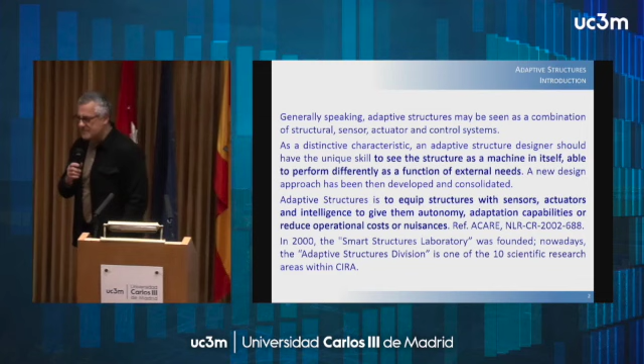But for doing what? What is the meaning of a structure? What does a structure stand for? To carry something and to have an elastic response to that. And then what else? Is it sufficient for you if I have a plastic system and I put a weight on it? The plastic will deform, so we'll have an elastic deformation. Is that the definition? It has an elastic response and it brings something, but does that define a structure?

Do you think that is a structure? Something so soft, so deforming? We are approaching the definition. A structure is something made to bring loads with minimal deformation, so as to preserve its shape. When we speak about adaptive structures, we are speaking about something that really conflicts with the definition of a structure itself, because it's something designed to allow large deformation, while still bringing loads and ensuring the keeping of a shape, so that the deformation is limited to a certain extent.

So we have the so-called paradox of smart structures. A smart and adaptive structure should be able to carry a load, be able to deform itself, and be able to keep the shape it's commanded to have without great variation. These definitions are all in conflict with one another. We have to keep in mind that we have to realize something able to change its shape, but keeping the shape that we want.

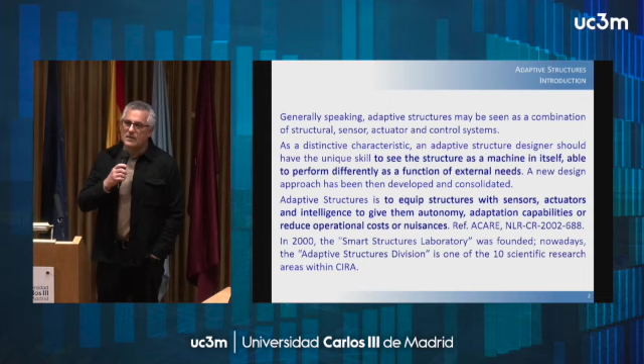One of the easiest ways to make an adaptive structure is simply to have something rubber that is very deformable, so you can give it all the shapes you want. But it is not efficient, because the way it deforms is also affected by external loads, so you are not able to match your intent with the consequence of the incident loads. So you have to develop some architecture in different ways in order to overcome this apparent paradox.

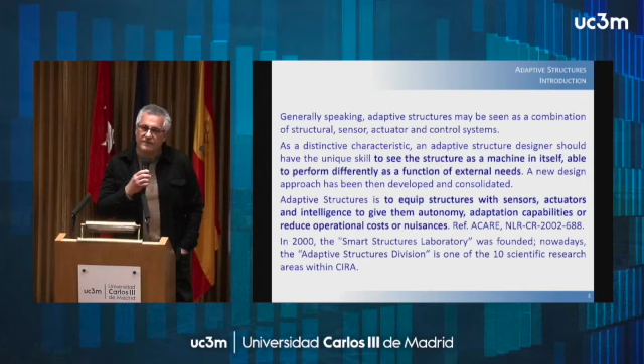One of the things that we do inside CIRA, where I work at the Italian Aerospace Research Center, is to use the actuators as bearing elements in order to give the structure the possibility of being stopped in certain deformations. This means the actuators are load-bearing elements, structural elements. They stop being just a mechanism to allow movement of something.

An automatic door does not carry any load apart from its own weight. Instead, here you have something that has to carry a load, the aerodynamic load for adaptive wings, for instance. And in that way, you have something that should resist. This implies a lot of things, like the actuator having to be sized to bear this kind of load, adding complication to the structure itself.

But the message is that you have a structure and an actuator, and the actuator chain is all part of the structural system. You no longer have just a structure, an actuator, and a sensor separately. You have something complete, something complex that overall works like a system, like a structure.

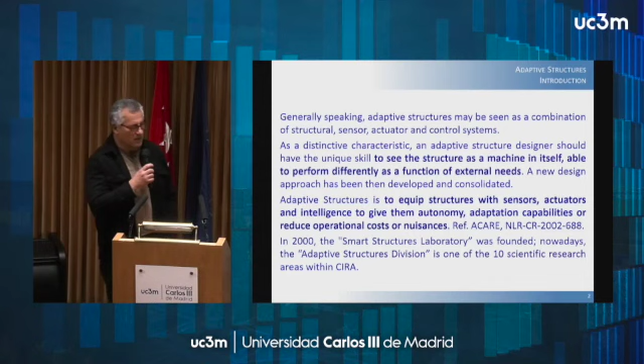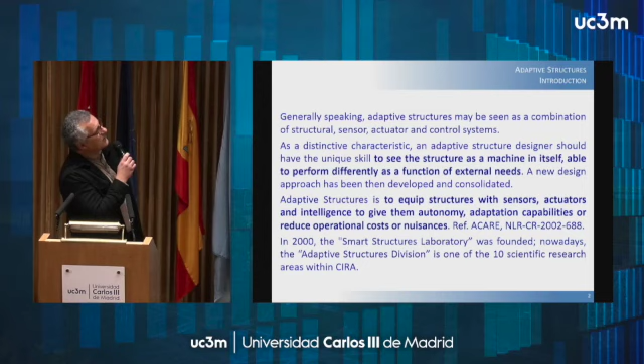If you go into the bibliography, you can find a definition of adaptive structures dated 2002, made by ACARE, an association for standards in Europe concerning aeronautical structures. They define adaptive structures as a structure equipped with sensors, actuators, and intelligence to give them autonomy and adaptation capabilities for reducing operational costs, for instance. They also define the aim of adaptive structures, but that part may be skipped within the definition itself.

This is something that works and we can consider current up to our days. But I would like you to reflect on something. If this definition is correct, and adaptive structures are made of different systems combined all together, then we no longer have a simple structure, something static that cannot be deformed, allowed just to bear weight and loads. You have something capable of modifying itself, of having different properties, so more than a static structure, you have a machine.

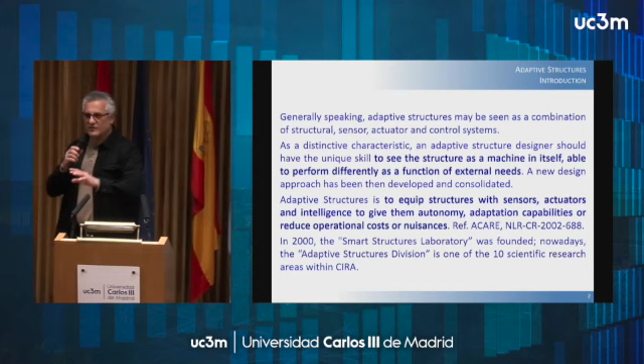We are moving, let's say, from the skyscraper to a transformer robot, just as a vision. But that is the way. You have a structure that is deforming, a structure that is a machine. And please remember this word, because I am going to show you something that replies very well to this concept, and it's very similar to the robotic world.

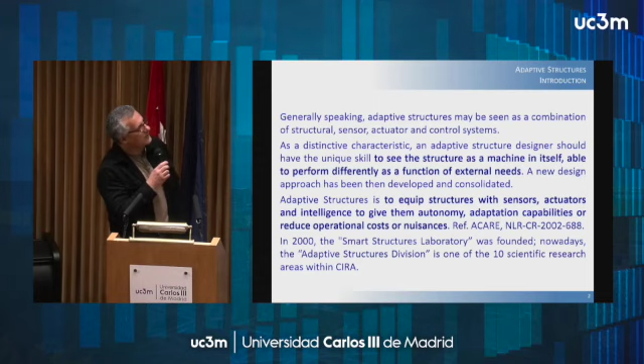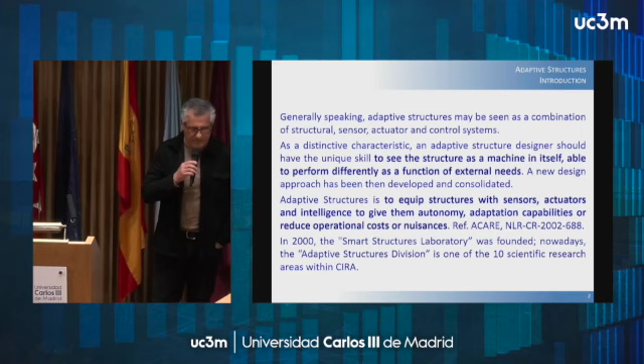In a sense, we can say that with adaptive structures, we are approaching the robotic world in another way, but maybe this can be discussed in further meetings.

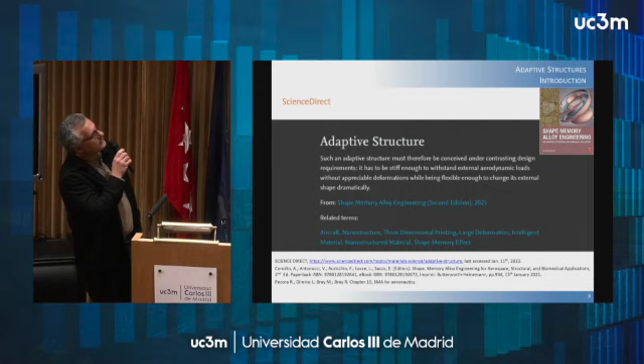One thing I am particularly proud of is that one of our definitions was reported on the Science Direct website for a month. They change the reference to different articles published throughout the world, and they took this definition from two colleagues of mine, Ignazio Dimino and Rosario Pecora. One is a colleague of mine at the Italian Aerospace Research Center, the other a colleague at the University of Napoli Federico II. They published this work within a book proudly published by us through Elsevier and Butterworth Heinemann.

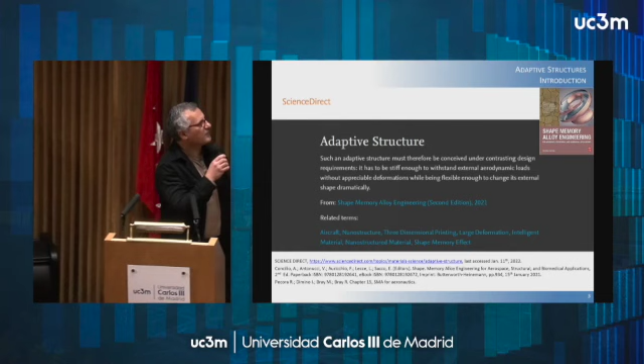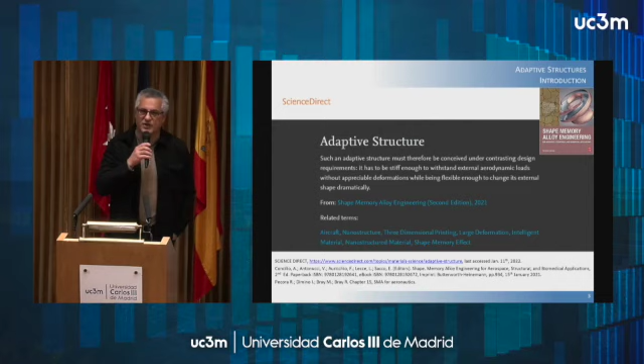That is a book on shape memory alloys engineering. I'm not making any advertising here, just a bibliographic reference. The main thing about that book is that it collects works from 50 scientists, 40 Italians and 10 from worldwide, who worked together on the matter of shape memory alloys. We will define shape memory alloys in a few minutes.

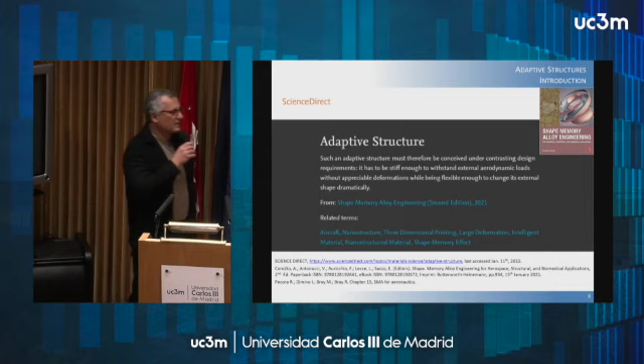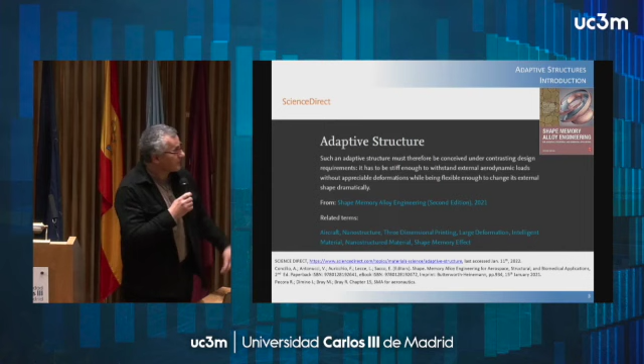The most important thing, apart from the content, and why I am particularly enthusiastic about that experience, is that these 50 colleagues trusted us and allowed us to collect their works and make this publication. It's something that happens once in a lifetime, for me at least. As you can imagine, adaptive structures may be a very, very wide topic.

You can have adaptive structures everywhere. My definition of adaptive structures is just mine - anyone can have a different one, and no one has the right response. But adaptive structures are everywhere. In a prototypic version, your chair is an adaptive structure. The flap of an aircraft is an adaptive structure. And this laptop, which you can close, is an adaptive structure.

What is the difference between all these things and the future of adaptive structures? These things are very complex and occupy very large volumes. You see the volume necessary to host the actuators of a flap that is outside the architecture of the wing, so that you have some protection to hide these actuators and so the aerodynamic flow is not affected by the presence of that system. It's very large, heavy, and room consuming.

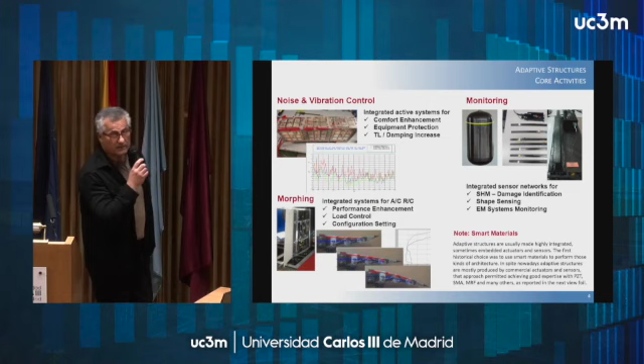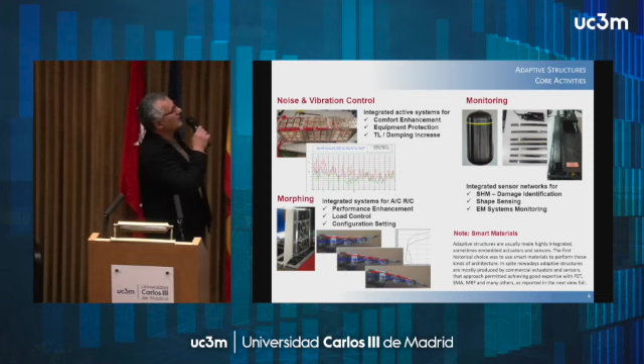The perspective of an adaptive system is to be compact, and in the first issue, to hide everything inside. In this sense, you can imagine two different kinds of adaptive structures, as figured out in this view of an adaptive aileron that we manufactured and tested in Canada at the National Research Council Wind Tunnel. It was a cooperation with the École de Technologie Supérieure de Montréal, CIRA, and University of Napoli. We developed the aileron, which had a continuous shape, and here you can see the hidden kinematics.

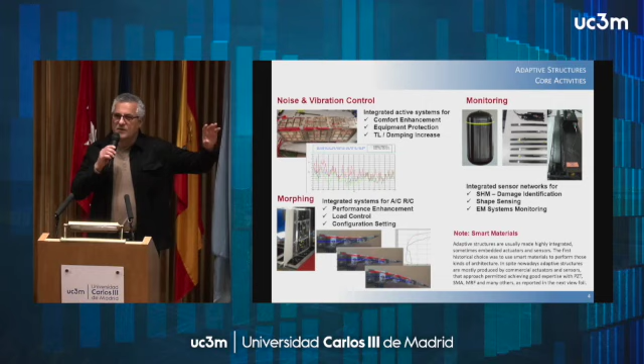So you can imagine two different kinds of adaptive structures. One is the transformer one - let's simplify it - a sort of robotic structure with all junctions, hinges, arms, and stuff like that. The other is like the Terminator 2 robot, that is continuous - usually known in literature as a compliant structure, something that is fluent and has no discontinuities. If you cover this kinematic structure with a continuous skin, able to resist external loads and preserve the shape, then you have realized what is a compliant structure through a kinematic system.

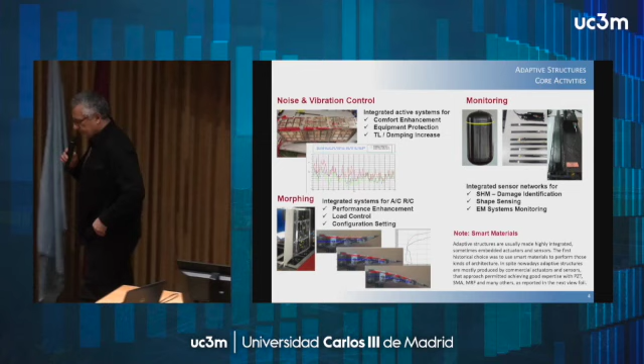I have no information about an adaptive structure today that is not made from a kinematic inner structure. It may be more or less complex, minimal, or invasive, but you always have a kinematic structure. And the skin today is the largest challenge for making a true adaptive structure work and operate, because this kind of skin shall have very conflictual properties. When you speak about adaptive structures, you are speaking about conflicts.

Systems that should do something and should do the opposite at the same time. The skin shall be elastic enough to be deformed without any effort from the actuators, so it shall stretch very easily. Otherwise, you are bringing extra work to the actuator system, which also has to deform the skin. And it shall be resistant enough in the vertical sense - in bending, it has to be very stiff. This is very complicated to obtain.

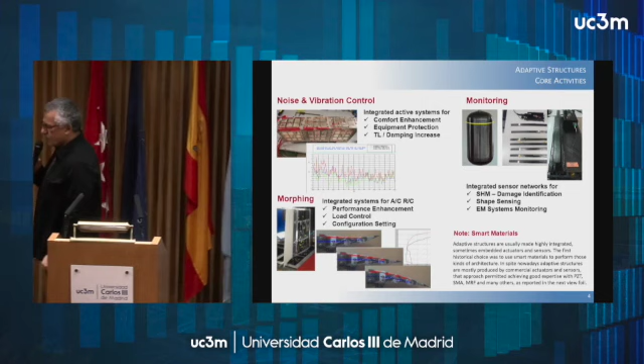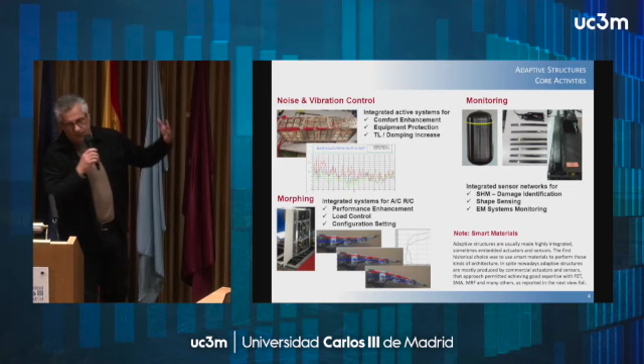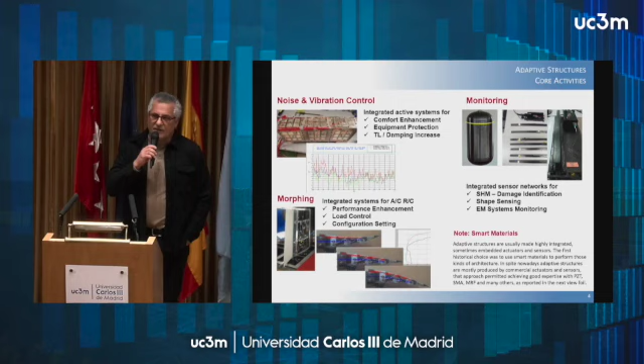As I told you, the adaptive structure world is very wide, and we at CIRA, the Italian Aerospace Research Center, do not have experience on all the branches of adaptive structures. I don't think anyone does. So we focused on three particular aspects. One is noise and vibration control. There are good reasons why noise and vibration control was the first application of smart structure systems in the literature, at least as we now consider smart structures or adaptive structures - it's a bit different, the two terms, but let's consider them like the same.

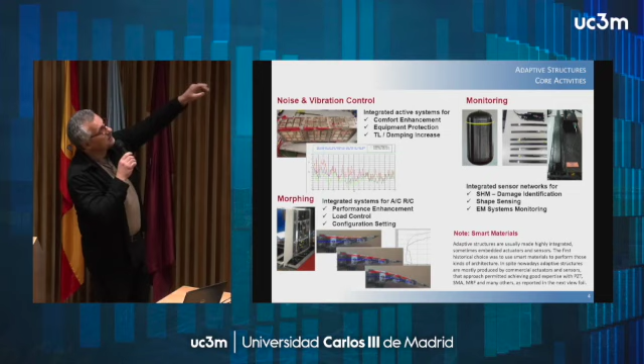Monitoring system, basically structures with embedded sensor networks for monitoring of the health, for shape reconstruction, and for the monitoring of electromechanical systems.

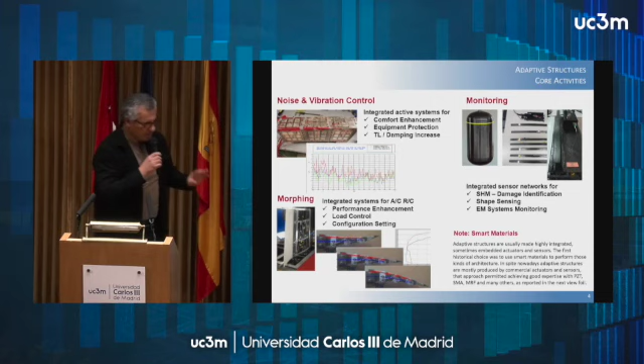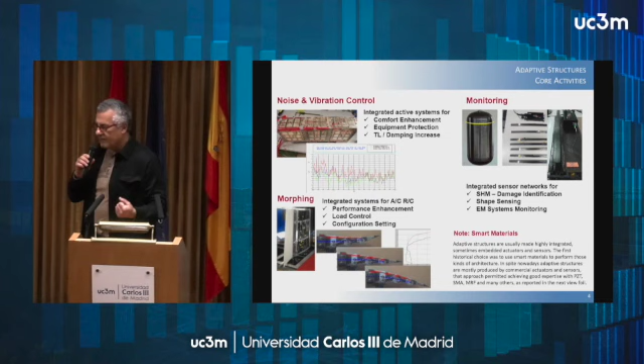On this point I would like to spend some words, because there is a bit of confusion, in my opinion, concerning structural health monitoring. Structural health monitoring means you are monitoring a structure, something that bears loads by allowing small deformation. The monitoring of electromechanical systems is different, because those are made basically from rigid parts that are not made to be structures, just made to be kinematic systems.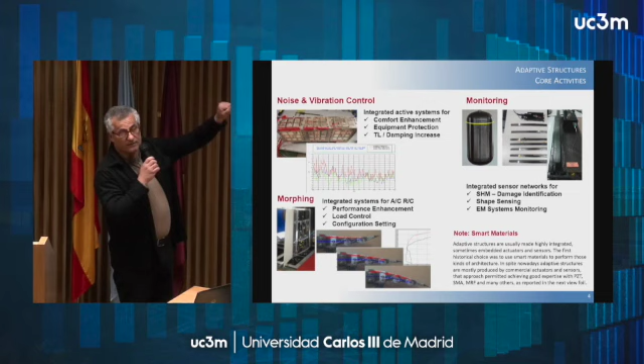I'm speaking, for instance, about landing gears. The landing gear is a complex machine. We put sensors on it to monitor the energy that enters the landing gear, to have an idea of the fatigue degree of that system. We are not making structural health monitoring, we are not monitoring strains to understand how the structure is affected, but how much energy is entering the system, and so providing fatigue to the system overall. This helps understand if the landing gear can resist for a longer life than designed, or should be substituted before.

For instance, if a fresh military pilot lands very hard, the fatigue that the landing gear shall absorb at each landing is very high. A professional pilot of a civil aircraft lands softer. So the same landing gear would be very resistant for the latter, but very stressed by the action of the former. This means, irrespective of the design, you should change the landing gear sooner for a younger pilot and later for an older pilot.

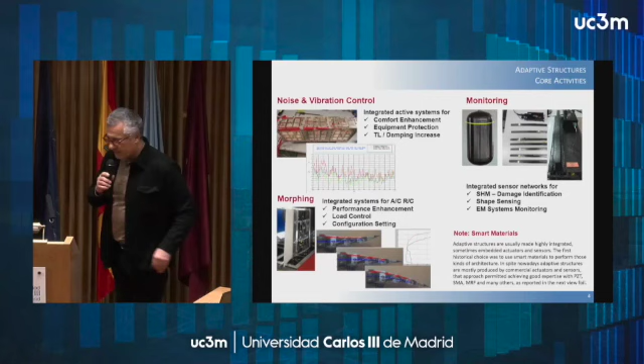So the complexity is to insert a sensor network within it without modifying its actual response. Something I would like to define before we go to some more practical examples. I hope to have some minutes to show these examples.

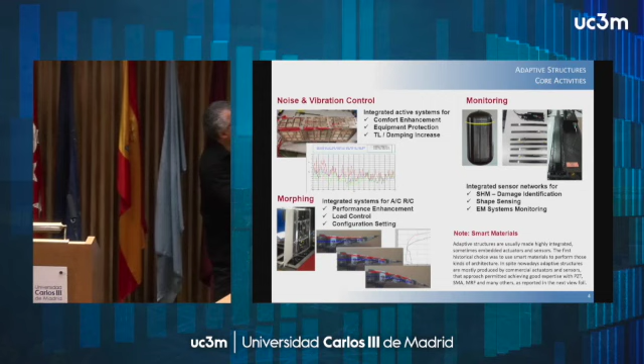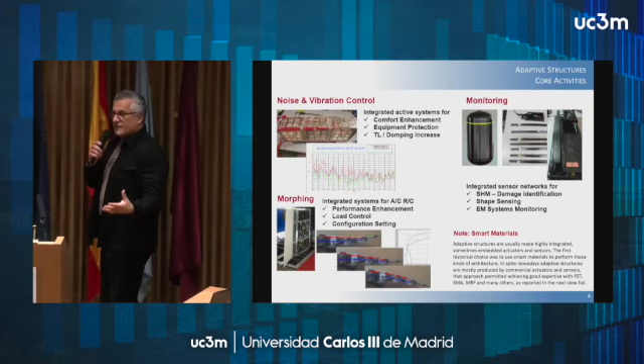An adaptive structure or smart structure can use smart materials, but doesn't necessarily need to. What I showed you here are morphing systems, systems able to change their shape without any visual impact from outside. You don't see any kind of actuation or sensor, simply a structure that deforms itself, using a commercial actuation system, commercial sensors, without any kind of development. It's a standard architecture. Smart materials are something that can transform external energy into mechanical energy, let's give this simple definition.

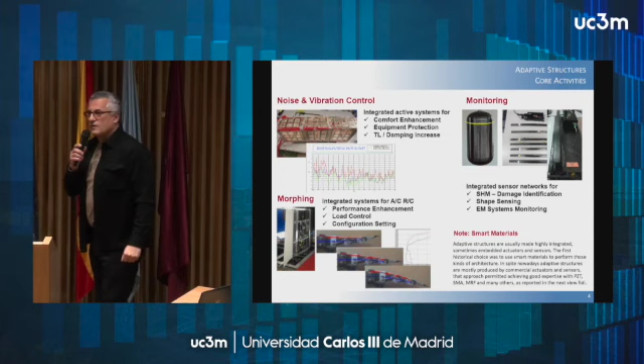They are good candidates for making compact actuators, but you do not need smart materials to make a smart structure, you can use commercial actuators. The advantage is obvious: you use certified actuators, you buy them on the market, and you skip all the difficulties you can have certifying actuators that are not commercial but still in development.

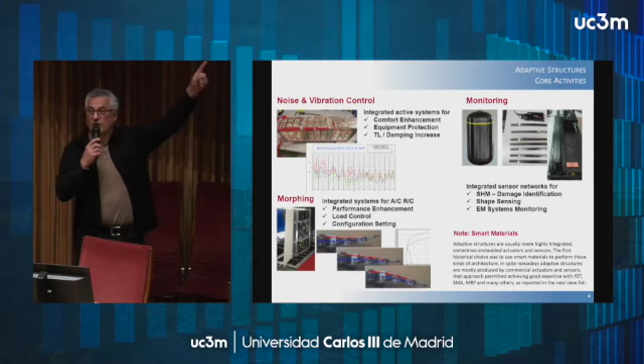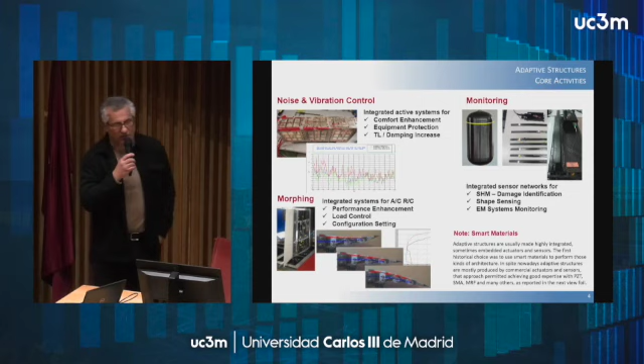The most suitable candidates are piezoelectric ceramics, able to transform electrical energy into mechanical energy, shape memory alloys that transform thermal energy into mechanical energy, and others like magnetorheological fluids. In that case, more than a transformation of energy into mechanical energy, you have a transformation of the state of the fluid, moving from a usual fluid to a near-solid by changing its viscosity as a function of the magnetic field applied.

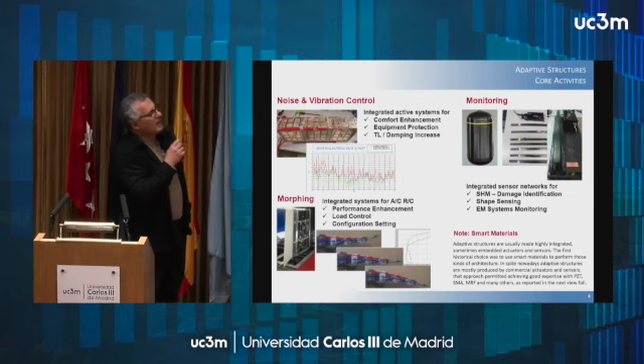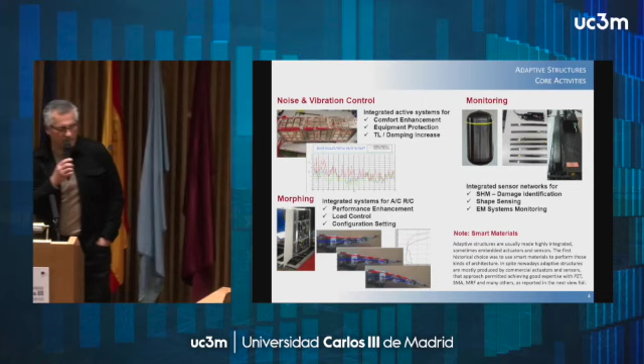As an extension, you can also talk about fiber optics for their capability of easy integration within generic structures, but they are not the essential elements. Here you can see some examples of smart structures made with smart materials, but they are not the only ones.

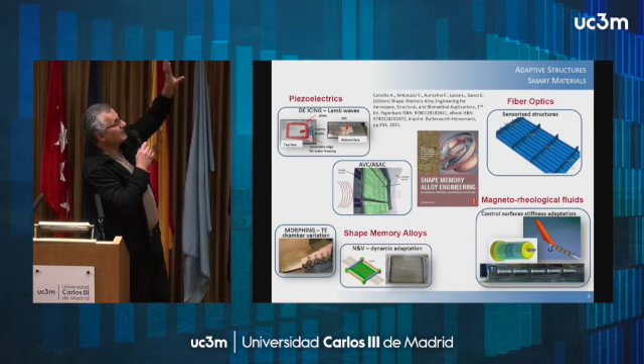All these examples were performed at CIRA for vibration and noise control. For de-icing protection, you can use the capability of transforming electrical energy into mechanical energy to produce waves at very high frequency within a structure, so to detach the ice from the wing. There are also anti-icing protection systems that avoid ice forming on the structure. In other words, de-icing means to remove the ice from the structure.

Shape memory alloys for realizing morphing systems or for modifying the dynamics of a plate. In the same way, you change the sound produced by your guitar by changing the stiffness within the wires using shape memory alloys, and you can also modulate this difference.

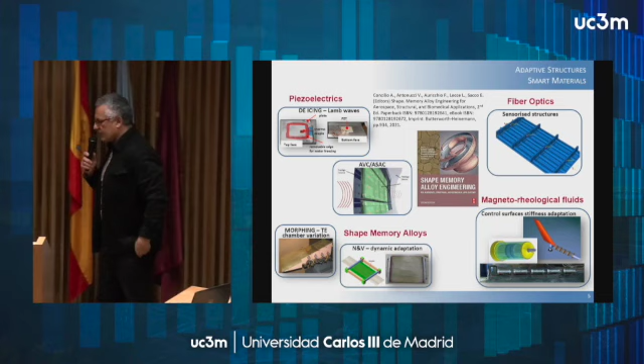Shape memory alloy is a fantastic material; the most classical one is nickel titanium, or nitinol, because it was first manufactured at Naval Ordnance Laboratory some time ago. It's a metallic alloy capable of a deformation of 8%. That means if you have a rod of 1 meter, by applying a thermal load you can reduce this length to 92 centimeters. You can imagine the force needed to reduce the length of such a rod. If you don't believe me, you can try, and you will find some difficulty, I guess.

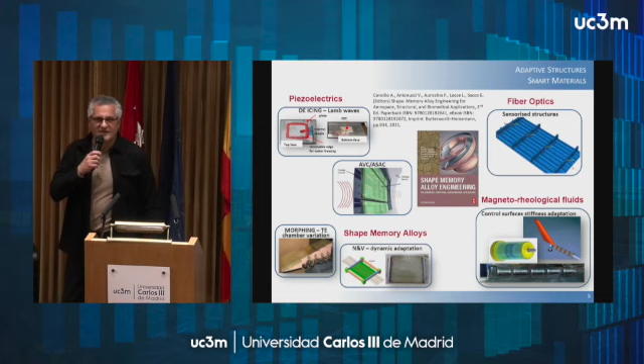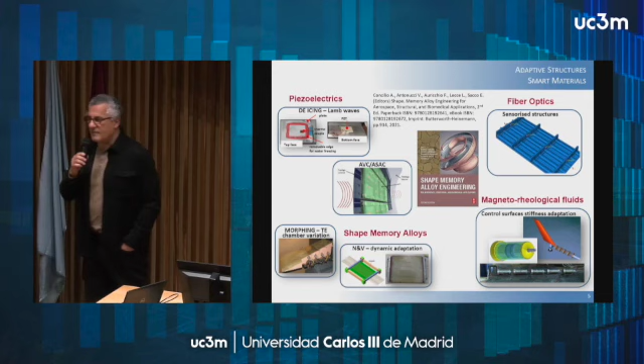They are capable of developing extraordinary forces. However, since you are applying thermal loads, you have something that is basically static, so you cannot use them for dynamic applications, but you can use them for static deformation that induces a dynamic variation, in the sense of dynamic property variation. In this case, the variation of the stiffness of the shape memory alloys produces a modification in the dynamic response of the plate, so you have new eigenvalues, new eigenvectors, new modal shapes.

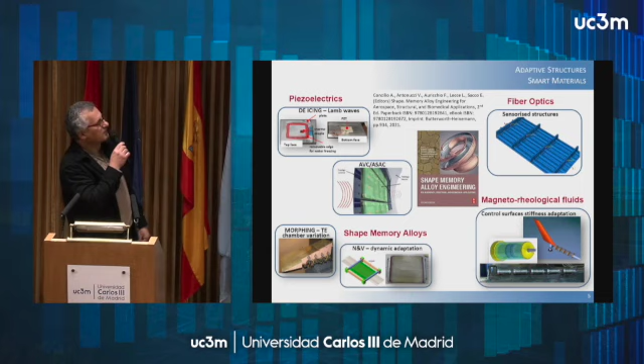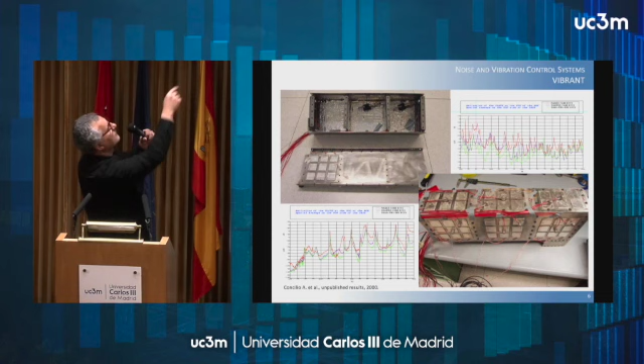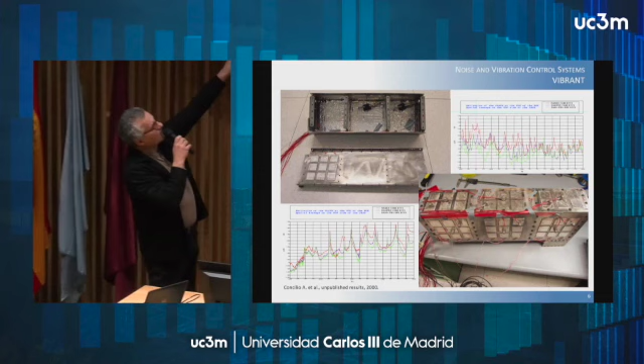Just a few examples for noise and vibration control. This is what we realized some time ago, concerning the application of a combined system of piezoelectric actuators. Sensors were made by accelerometers placed all over the structure, and in the upper part of the screen you can see those silver-like structures — sound-absorbing material. By combining active, passive systems and stuff like that, we reduced the noise and vibration field, in this case for electronic equipment protection, by something like 10 dB in the range between 100 and 900 Hz. So really a wide spectrum of reduction.

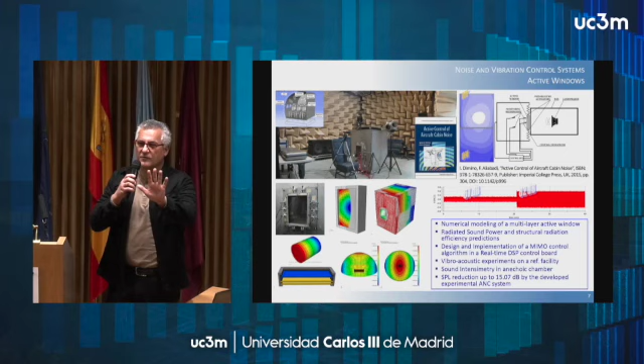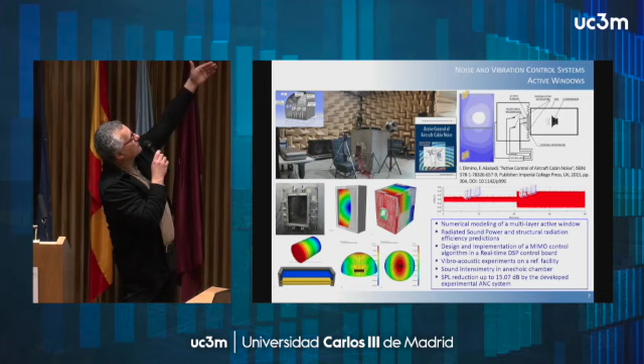Some other examples regard the active noise radiated by windows, which is very difficult to realize, because a window is something you cannot cover with anything — otherwise you lose the window, and your system is useless. So you have to act on the border, like in that example. In this case, we used piezoelectric actuator stacks to give the frame a sort of counter-vibration, to reduce the vibration that would otherwise have radiated noise outside the box we used as a test article.

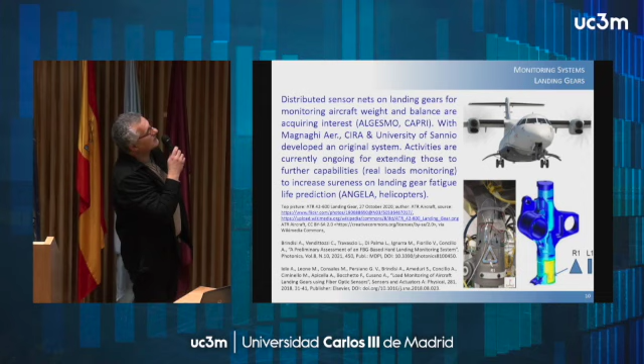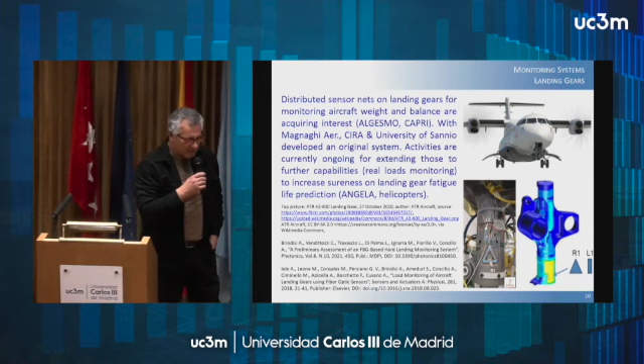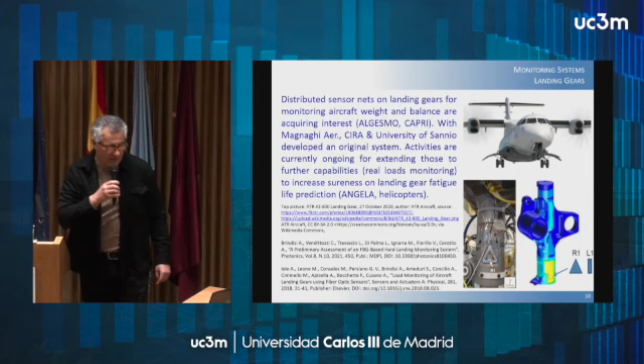Some applications on cars, shape reconstruction. This is the example I spoke about before, concerning the smart landing gear — a landing gear equipped with sensor networks to record the strain produced at landing, but also on the ground. Have you ever considered that no one knows the real weight of an aircraft at takeoff? No one can know it. No one asks the passengers to be weighed before entering an aircraft. Apart from the luggage weighed on the balance at embarkation, personal luggage and yourself are not weighed. So no one knows how much an aircraft weighs or where the barycenter, the center of gravity, is. This can be a problem.

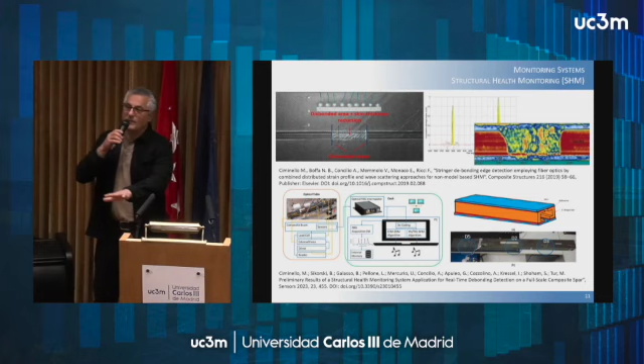Another problem concerns the real information about the exact instant when the wheel detaches from the ground. That's important because in one case you have some weight transferred to the ground, and in the other case the machine — the helicopter, the aircraft — is free to move. But if the wheel touches the ground, this could cause a problem when making some maneuver, and accidents have happened for this reason.

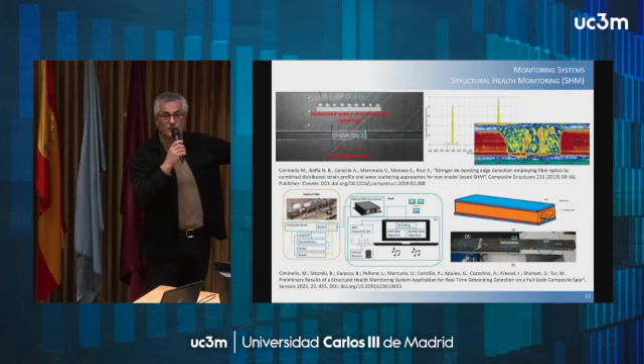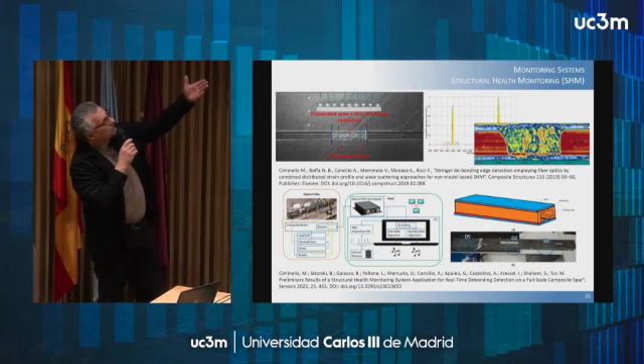These are examples of health monitoring systems performed using fiber optics, both distributed and concentrated. Distributed fiber optics means you have a very, very dense network of sensors, each 1 or 2 millimeters apart. FBGs are more concentrated, let's say 1 sensor each centimeter, for a limited number of sensors. The difference between the first and the second is that the first can only be used on the ground because it cannot fly — the optics are very sensitive to movements and vibrations, so you cannot fly with that. The other one can be flown, and so it is currently used for developing flying structural health monitoring systems.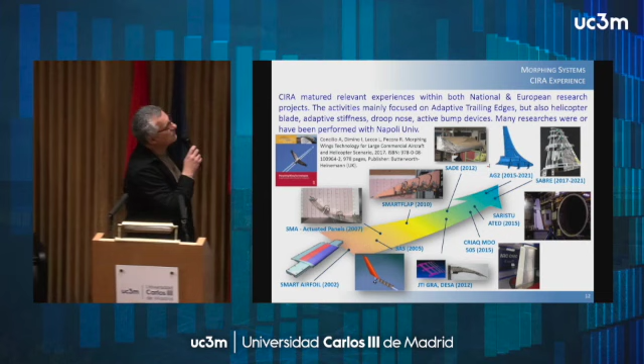Just a fast overview of our experiences, to complete it with two messages. One is that to arrive where we are now, we performed some work - you can see that image named AG2, a European project where we are going to perform flight tests. The date shown is wrong; the project will end in 2023 because we experienced some difficulties making all the checks for the system to fly, and now we are finally approaching that target.

Some good examples of adaptive structures were tested full scale. Another problem concerning adaptive structures is their scaling. It could be nice to discuss, but please have a look at the bibliography concerning the scaling of adaptive structures.

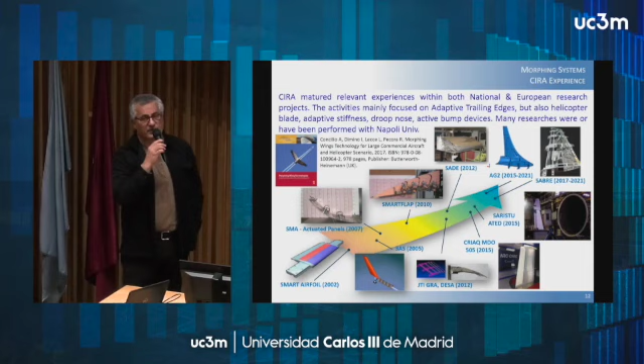In Saristu, together with many other partners, we realized an adaptive wing made of an adaptive leading edge, an adaptive trailing edge, and an adaptive winglet. We were particularly focused on developing the adaptive trailing edge, together with 10 other partners. The wing shown on the far right is 5.5 meters long and was tested in Russia in 2015.

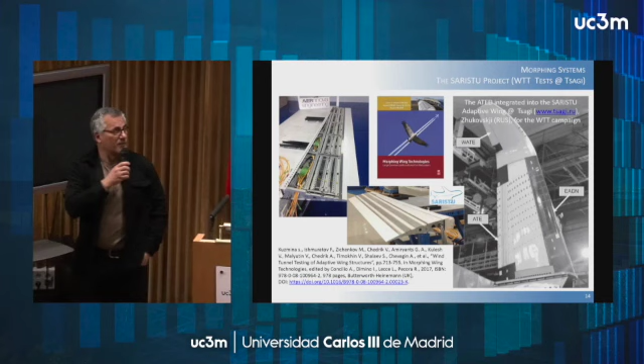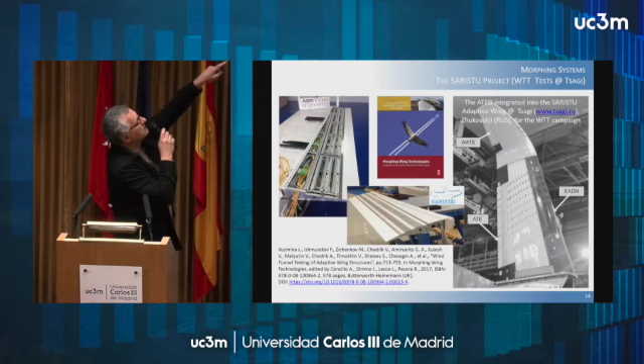When I talk about a machine, this is the adaptive trailing edge as we developed it. On the top left you can see the prototype that was realized very close to here, at Aernnova engineering plants. You can see the structure is no longer a simple structure but really a machine, with fiber optic cables (yellow), electric cables feeding the actuators, electric actuators (green wires), and all the different parts that make this flap - the last part of the wing - a sort of finger.

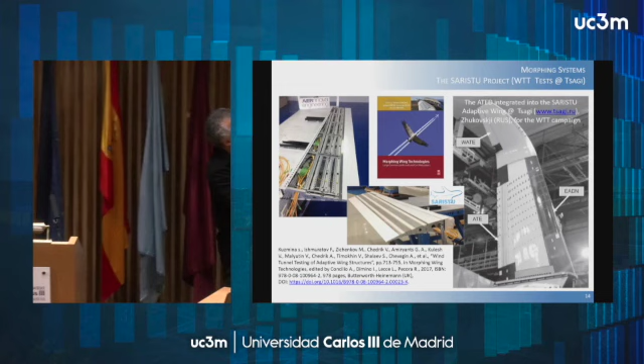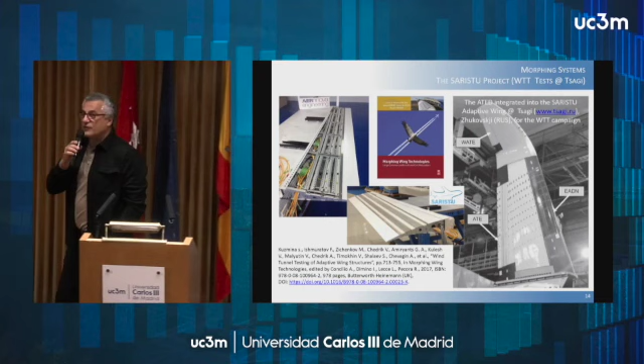Here you can see the same prototype once the skin, produced by Fraunhofer Bremen, was installed on it to give continuity to the shape. All this was mounted on the Saristu adaptive wing with the three adaptive parts realized. The wing box was manufactured by Leonardo Aircraft, and the whole project was coordinated by Airbus Deutschland, Airbus Germany. That, more or less, is a milestone in our developments.

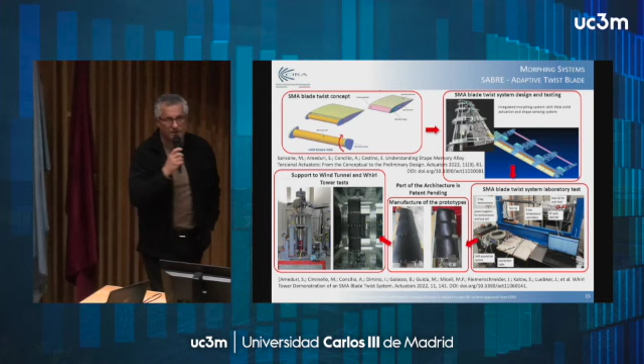To conclude - I spoke about AG2, I spoke about Saristu. Another interesting project, led by my colleague Salvatore Ameduri, is Sabre, concerning the development of an adaptive blade for helicopters. In this case we can see how smart materials, specifically shape memory alloys, can be used effectively for realizing adaptive structures.

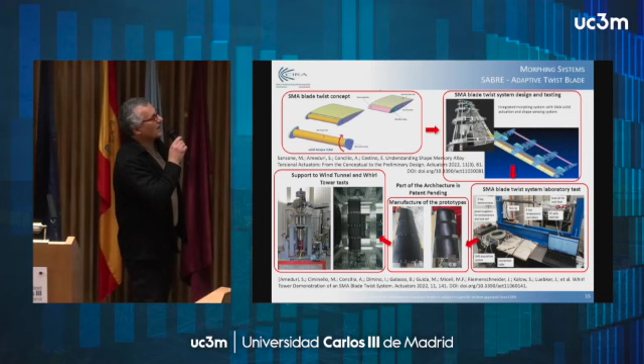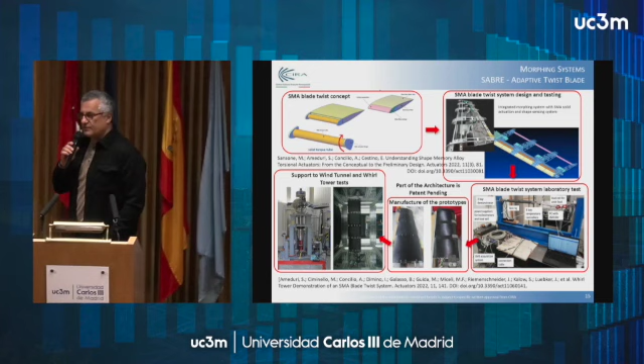Really, that is the only choice, because a helicopter blade that is 4 or 5 meters long and only 20 centimeters wide, with a thickness of a few centimeters, cannot allow mechanical actuators inside - there's no room for that. You cannot put the actuators outside the blade either, otherwise it wouldn't be a blade anymore. So the only way is to use smart materials able to change your electrical input into a mechanical action. This is an example - I repeat because it's important - where you need smart materials to realize a smart structure, in this case an adaptive structure, because of weight constraints, room constraints, and other factors that force you to use this kind of system.

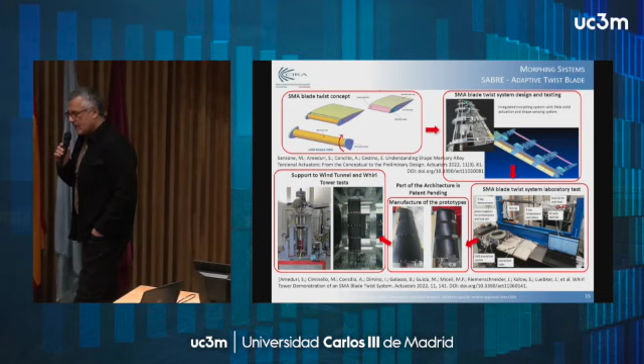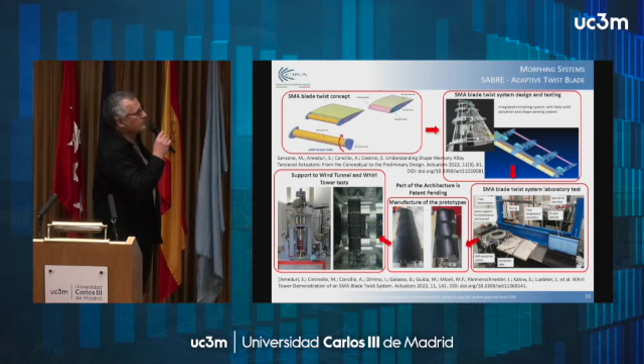This system was realized and has so far been tested in the whirl tower at DLR and in a wind tunnel at the University of Bristol, both partners of SABRE. SABRE was a European project where many partners, not only CIRA, performed and realized their own devices to be mounted on helicopters. I'm just speaking about our own realization, but again, in the bibliography, if you are curious or interested, you can find more material on that.